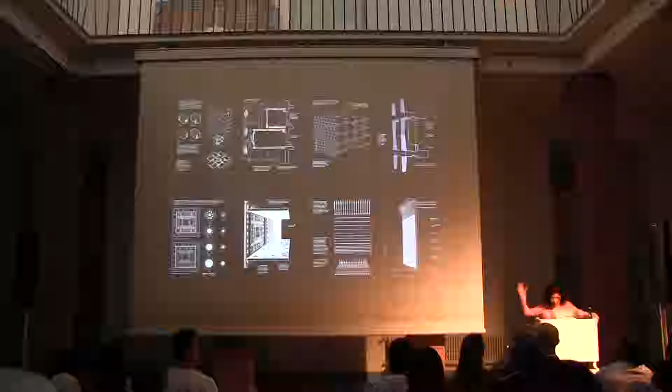And determine how they relate, how they are to come together, what kind of priorities they are to be set. And it is exactly in that process that I think the politics of buildings are shaped, not by bringing a building's elements in the service of the representation of a grand manifesto, but through the way they are arranged, which results and manifests itself through a series of affects.

Just to clarify the use of affects here, in the kind of philosophical sense of Spinoza, elaborated by Deleuze and Guattari, as a series of intensities that are emitted by bodies, by objects, by things, as a consequence of how they are assembled. Their relevance to the subjects of activism or politics of buildings is that they lead to the augmentation or the diminution of our body's capacity to act.

So if we look at this, for example, a door or a gate in the perimeter wall of a building may generate affects of closure and traversability. Handrails designed in this particular way around museum exhibits may generate visibility but also untouchability. Skylights in a train station may generate affects of transparency as well as protection.

So what is the agency of the architect in this process of assembling a building? Imagine that you are buying this apartment. You survey the room to imagine how you would occupy it, whether it suits you. The placement of the window in this room is an architectural decision, not the window, not the wall, not the floor, not necessarily the size of the space.

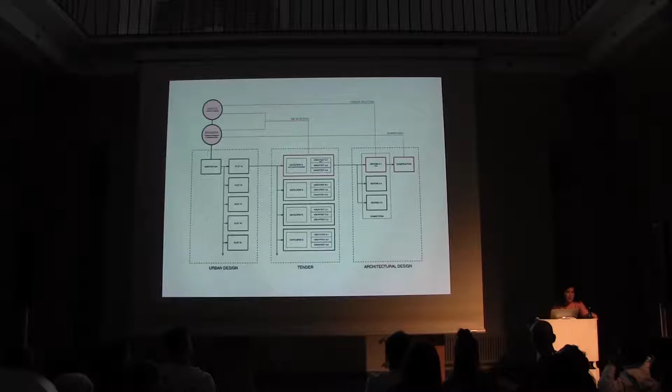So private investors need to come and bid for a site, obviously putting a financial proposition down, but also they come with 3 architects that they would be happy to work with. And if they are selected, then the architects need to compete against each other, and it's the city that chooses, not the client, because they've pre-selected the architects. That means, of course, design is a part of the agenda here, or the architecture.

The site, being by the Grand Axe, so we are just on the other side of the Arch, obviously brought certain questions, how, for example, the way of living in the city in a collective residential building limits people's interaction with the outdoors, because you don't have your own garden. The site sits on that red bit, so it sits just where the extension to the Grand Axe

has been made towards the River Seine. It kind of bends to go towards it. It is sandwiched between 2 cemeteries, so this exceptional location left it poised for a new relationship with the Axe, but also with the natural environment, because it has these 2 very green cemeteries either side.

Now, in a multi-story residential building, it is the envelope that I would call the agent, determining the relationship between people and the outdoors, between public and the private realm, and the way that the building is integrated into its context. The shape of the envelope, as dictated by the site outline, would have been this kind of deep slab form, which obviously, because of its depth, would

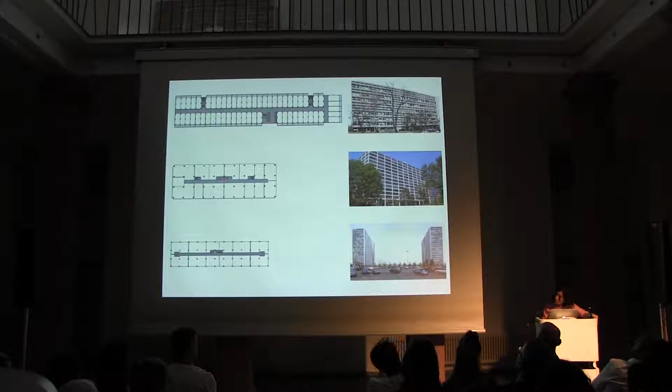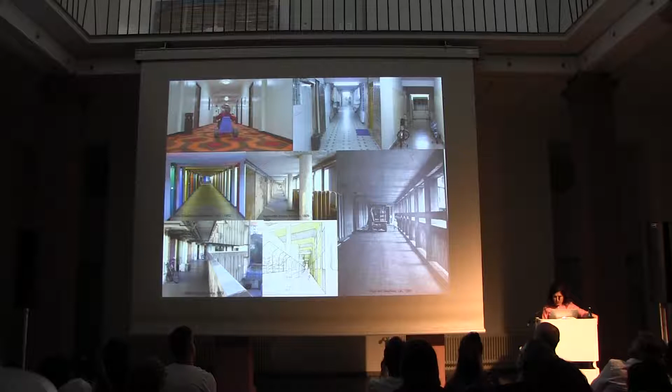The other convention that we decided to question was how living in the city has been forcing people to decide between either communal life or segregation. As these diagrams show, in a multi-story residential building, the depth of the floor plate usually means, especially in slab form like the kind of site we were working with, that you have a lot of neighbors sharing a corridor, which not only makes single aspect apartments, which are often dark and stuffy, but also socially unsustainable because they can be frightening and dark. It also means people pass each other's front door to go to their homes.

Inherent in the corridor arrangement has been the assumption that neighbors will form a community. That needs to be questioned today, because the nature of neighbors has changed from homogeneity—when most households comprised a single nuclear family—to difference, since today a household may mean singles, divorcees, same-sex families, co-living, multi-generation, or the elderly. So the communal corridor is a vestige of the modernist vision of communal apartments, which went as far as proposing communal kitchens, dining rooms, terraces, even telephones.

A model of coexistence derived from an idea of community that is obviously redundant today. It falsely assumes that people who live in close proximity desire any kind of closeness, and is practically inconvenient, because it belonged to a time when people would go to work and come back at the same time, rather than have unpredictable comings and goings which disturb each other, or that they came from similar cultures and backgrounds, which in a big city like Paris cannot be assumed.

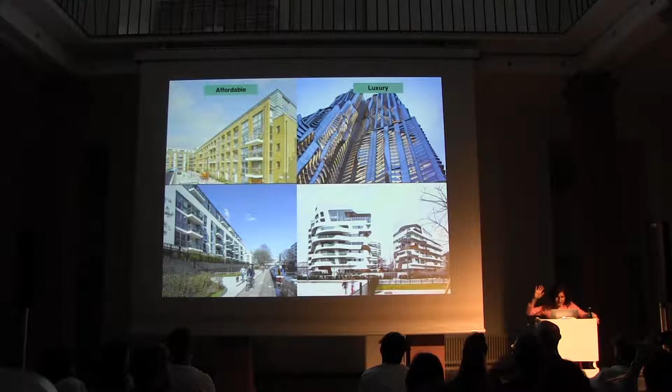Our brief, we had an amazing brief to begin with, which was the vision of Nanterre's mayor, a communist, who proposed that we would accommodate different household types in one building. So it was a great starting point: 91 social and price-capped apartments, 110 rooms for students, and just one level of maisonette penthouses at the top.

So given this brief, which was not at all about segregation but the opposite, we saw our agency as generating maximum privacy between these different kinds of residents, as well as figuring out how to bring them as close as possible to the nature outside.

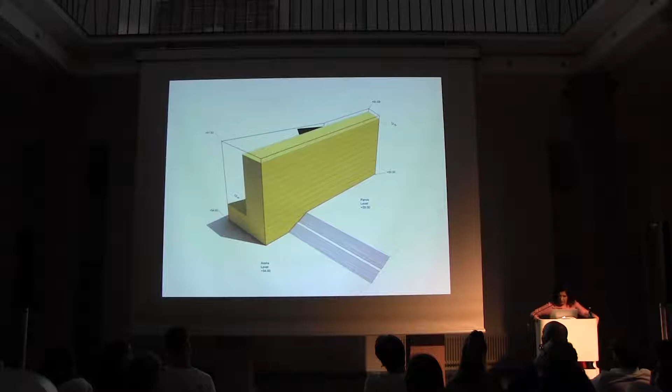The envelope is designed shallower, not its full depth. It's 12 meters shallow to avoid the typical corridor arrangement that enforces sociability and collectivity on people. So instead, in the 12 meters, we can divide the apartments laterally with point access circulation, so every two neighbors share a stair and a lift.

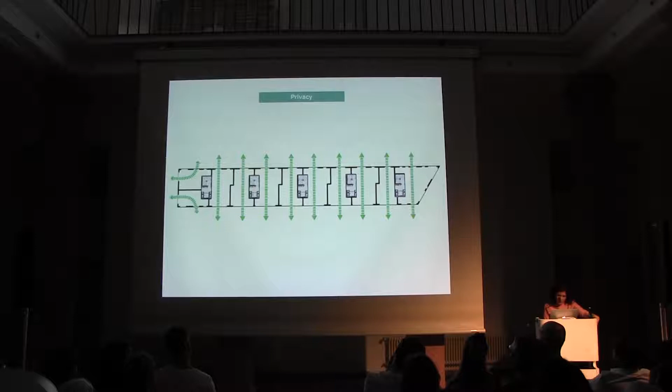This was particularly relevant in the French scene, because they have this great setup where people who place their name down for an apartment can actually come and ask for their walls to be arranged as they choose, which in this case meant giving them a lot more possibility of potentially having the whole thing as an open space.

Glazed at both ends, the units benefit from lots of natural ventilation and light. We can then also provide each unit with outdoor spaces at both ends, so that the interiors could spill outdoors. With this arrangement, the apartments are very similar to a single-family terraced house — they have privacy, private external space, and a strong contact with the outdoors, which we will see.

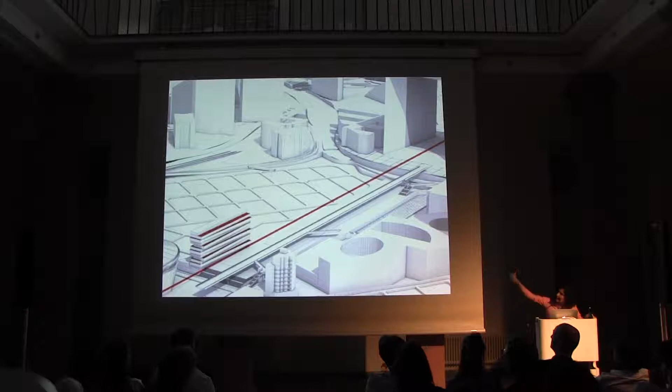Now, to shift the strict separation between the building and the exterior big open space provided by the Paris axis, we employed, or activated, the agency of the floor plates. We shifted them on plan by 2 degrees along the length of the building.

This gives a certain axiality rather than verticality to the building, but it also develops an environmental agency, because the building acquires a stepped silhouette, and every floor shades the one below as a consequence of this shift in plan, which means that only the red floors would need shutters for privacy and shade, and the other ones can be left open.

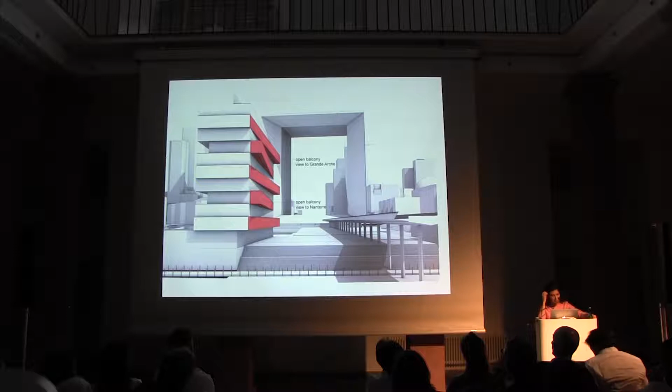It also means every apartment's outdoor space is varied — a loggia on one side and a balcony on the other, and the floor above would have its loggia on the opposite side and its balcony on the other side. We will see that this creates a lot of variation for the residents.

Now, to reinforce the inclusive approach of the building, we have left the interiors very bare. Usually in the UK, you would fit out the kitchen and bathroom for people, and a lot of the building budget goes to those, and it's perhaps not really what people want, and then they're stuck with it — they may not have the resources to just throw them away and start with their own. So here they're intentionally made very bare, to prompt people to appropriate them as they want, and to make the interior really the area where people express their affordability, if you like.

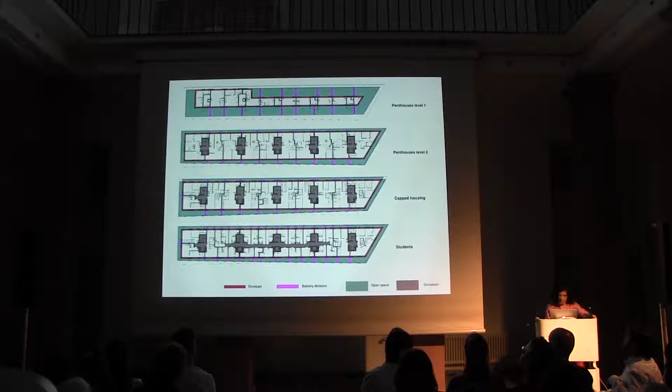Instead, on the exterior, we have taken all the elements common to the different kinds of residents across the building — those are colored here — and designed them exactly the same way, a little bit like a Haussmann approach, if you like, where the typical Haussmann block was very much about embracing the social strata of the city in one block.

It did have, of course, a hierarchy — the people who were less wealthy and had to walk up the stairs were at the top, and there was no outdoor space. But it embraced the idea that the city ultimately belongs to everybody, and every building should accommodate everyone. So in our case, the stepped silhouette gives them all these differentiated spaces either side, marked with the green and the blue.

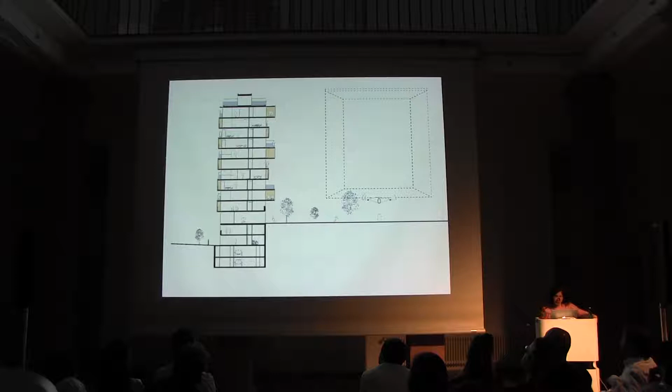So the blue is the loggia, and the green is the balcony, and the kind of greeny color is the loggia that you can close. These are intermediate spaces, neither inside nor outside, without any function, so that again they would prompt people to just use them as they will.

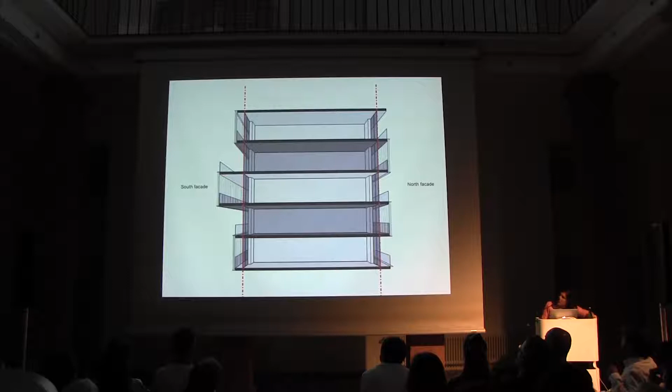They vary along the size of the building. These are two sides of the same apartment. So this is one end of the apartment, that's somewhere in the middle, and then it changes again here. They change depths, which means we get this variation, a choice given to people, which are architectural choices.

The units may be the same size, but they will have different size balconies, which are not part of the price of the apartment. They will have slightly different geometries depending on whether you're at the end of the taper or in the middle, and they also have sectional variation, which we will see.

What is interesting is that the top two floors, which are the penthouses, are actually not very different in size to the social apartments. They have a greater terrace. So it's really their contact with the outdoors that gets greater as a point of luxury, rather than the size of the apartment.

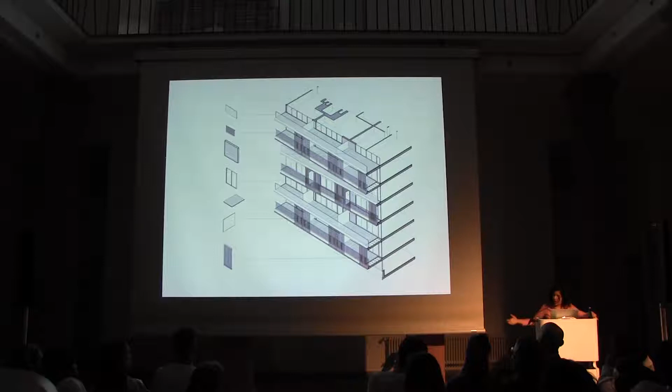The other things that carry agency and give architecture relevance in terms of people living here are, of course, what materials you use. We decided to take all these basic elements - extremely simple elements that a residential building is made out of: shutters, handrails, dividing walls, soffits, and glazed walls - and use materials that require very little maintenance, because if you live in a collective building, having to pay large sums for maintenance is disempowering. It's aluminium, glass, hardwood, very little paint.

And these together are, as we've been seeing, not assembled as a thin membrane, but as a zone that they can appropriate in different ways. Now, each one of these elements, which we could call micro agents, carries also different other kinds of potential.

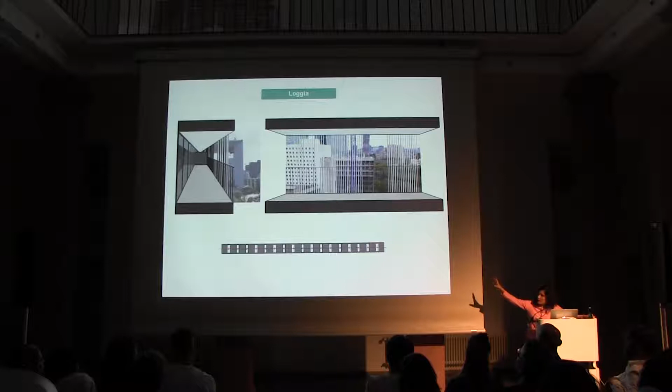For example, the shutters of the loggias would perhaps normally be designed with thin, blade-like profiles. We have designed them with diamond-shaped profiles, because this shape allows us to widen the amount of view you have in one direction, while still keeping the breadth of the profiles so we could limit views in from the other direction. As a result, some of them, depending on where you're looking, can obstruct your view completely, whereas here we were seeing some views through.

And they change orientation. The shutters themselves slide, but each one, depending on where they are along the length of the building, is rotated in a fixed way, in order to respond to the different depths of space behind, but also to the orientation of the sun relative to the building. As a result, the same anodized aluminium shutters catch the sun differently, appearing light gray to darker, and these change throughout the day.

And they bring a certain amount of temporality to the building - blue-black, for example, at night. So for passers-by who would never even live in the building, their experience becomes of a building that actually changes throughout the day. The shutters slide, and people can either enclose the loggias entirely or open them partially to frame a view or let sunlight in.

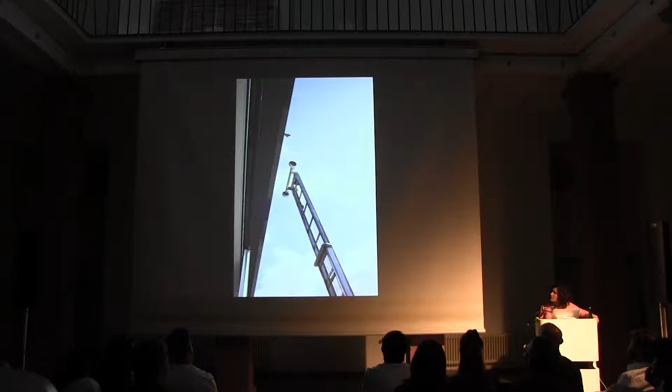This is like the first day in France. I'm not sure how you move in here, but in England you take everything through the elevator, whereas here they take them on these ladders, which is kind of a spectacle, resting on the facade.

During the first week, we could already see that the residents are of a very different kind, and that the process of moving in meant quite different things to them. Could this be a single man occupying the corner apartment?

He faces a sports arena. Obviously, he didn't mind that. Here's a single family focusing on the move. Here's a young professional who is clearly using the apartment already as a work-live space. Here is a student, a more traditional family where the grandmother is living with the family. For them, furnishing the balcony and setting it up so that they could eat together was more important.

They use it as a way to, if you like, trade - to do things for each other, to communicate. If someone wants to get a tutor for their teenager, somebody else in the building might be able to offer that. Or if you want to fix your fridge and it's broken, you might do that for a neighbor in return for money, or I guess for other services.

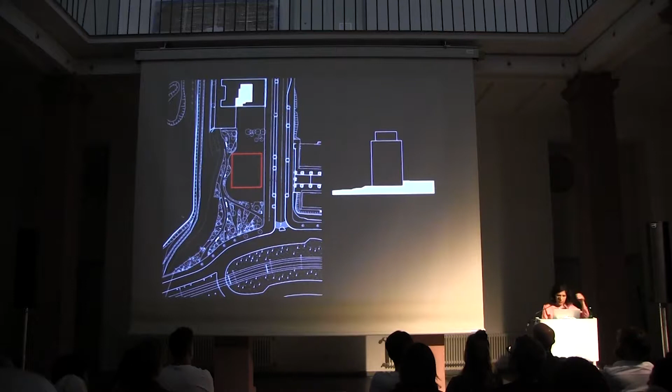So the envelope is designed as a 9-story compact shape. This allowed us to go to the maximum height we were allowed by the regulations, to leave a garden around this building, to create a folie setting, if you like. So there is a garden around this mini tower that can maximize distant views for the apartments.

The core is located centrally, that kind of gray area. The structure, the core is used as structure, marked in red. The rest of the structure is placed on the perimeter of the envelope in order to leave the interior liberated of any load-bearing structure, so they would have no fixed elements, and residents can reconfigure them as they will, the same strategy as in Nanterre.

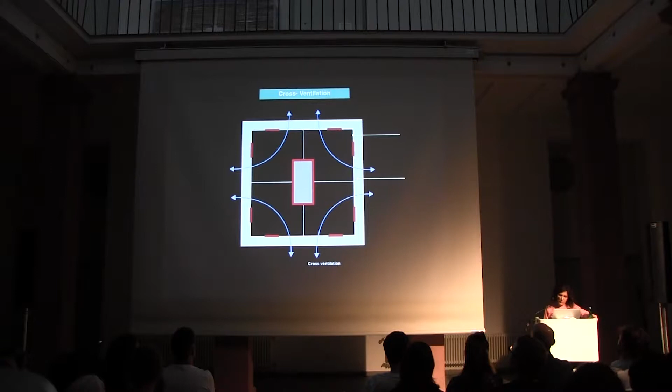Now, by insetting the envelope, we can create a kind of balcony all around to maximize the length of balconies to each apartment. The surround balcony, as we saw before, requires these kind of dividing walls. It's less of a problem when you have a more compact form, but despite that, we would need it. So if we would pinch, if you like, the balcony at the border between the apartments, we would, of course, remove that dividing wall between them.

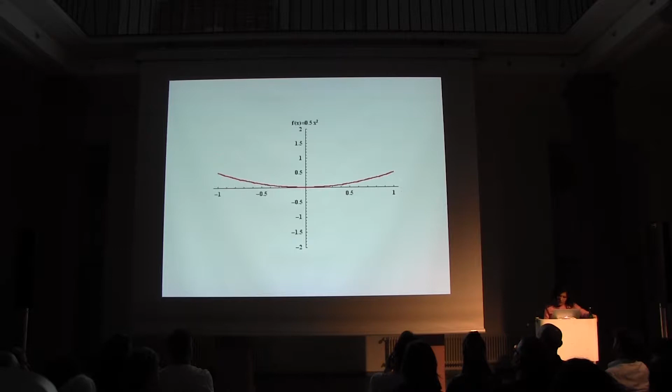If we think of the envelope, that inner wall, not as a constant border but as one that shifts constantly with inflections, as it wraps the building it would change the relationship between inside and outside, from room to room, from apartment to apartment.

These inflections would improve the corner balconies, making them more useful. But a problem still persists between apartments, as exists in the Marina Towers, where you remove the dividing wall and see out, but you also see into your neighbor.

That also exists in the Aqua Tower. Again, both have curved balconies—you see out a lot more, but you have this problem of overlooking. Also, because they are multi-story residential buildings, you have overlooking downwards too, so neighbors can look into each other.

We tried to think about how we could use or introduce curvature into these balconies so we could address the issue of privacy. So we changed the number of inflections, both to the outer profile of the balcony and its inner profile—or you could say the envelope that divides the inside and outside.

As a result, we have balconies located in these situations where they have 180-degree views out, but they do not look at each other. It's impossible for one neighbor to see the other, as you see here.

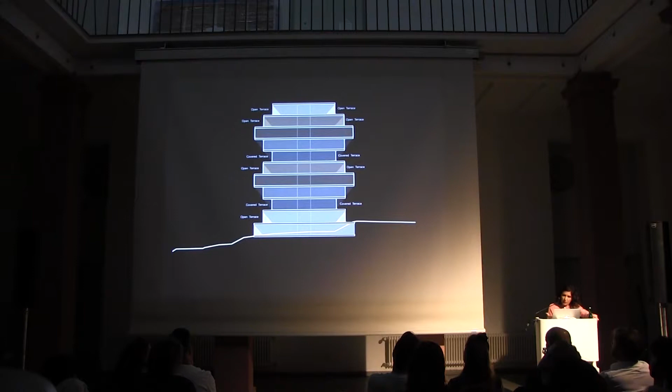As a consequence, the balconies shift from one floor to another, and this playfulness of the shape ends up producing a situation where balconies are two levels away from each other rather than one. It also means some are single height and some are double height, introducing variety to the basic choice residents would have.

More importantly, rather than a simple stacking where you would see the neighbor below, because there are two levels below, the lateral and downward overlooking is much reduced. So a simple decision about the shape of the floor plate, its location, and whether you have one or several floor plates ends up having a great consequence for the people who live in and use these apartments.

Now, the handrail of a balcony is another agent. Handrails of balconies in residential buildings have two contrasting functions to perform.

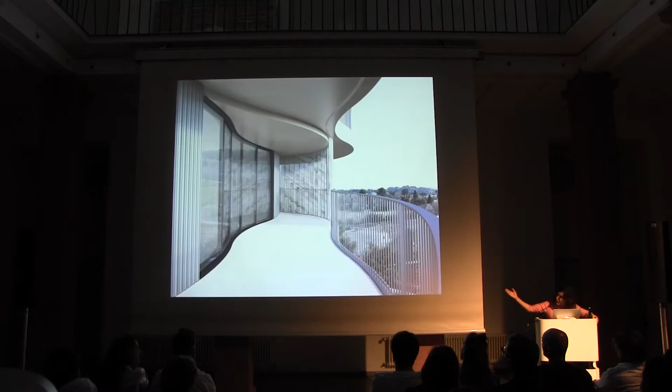The building isn't complete, so I can't show you how people would have occupied it. But I'm pretty certain that giving people balconies that are so private, with the choice of whether to be more private with an additional outside curtain or more exposed, is bound to prompt different kinds of uses from these residents.

We don't really know how residents have chosen to subdivide the interior of each apartment, remembering that in France they get the choice to do that. But since the rooms are such different shapes, furnishing your room must be a more creative exercise than if you were given just square rooms.

The building prompts that engagement. You have no choice but to think about the fact that people have decided to live here. We can imagine that the curvilinear envelope will bring many more different kinds of views into each unit than an orthogonal building would.

The unique location of each balcony will frame the outside very differently for its residents. No two balconies will have the same view. The curvilinear shape is almost like the experience of sitting in a tree, sometimes a smaller one, a different kind of relationship that ends up feeling less like a neighbor above and more like a piece of nature.

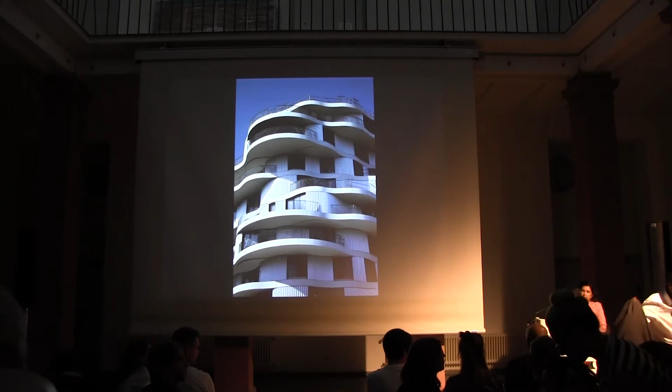My experience is that when you're working on these projects, most of it is assumed, and it's up to you to pick at them. Nobody is going to worry about the handrail unless you make it an issue. And these two housing projects are actually for the same client. When we started working on the first one, they hated me during the process because they said, well, why are you asking questions about the dividing wall? We don't make an issue of these. Why do you? And I think now they kind of understand.